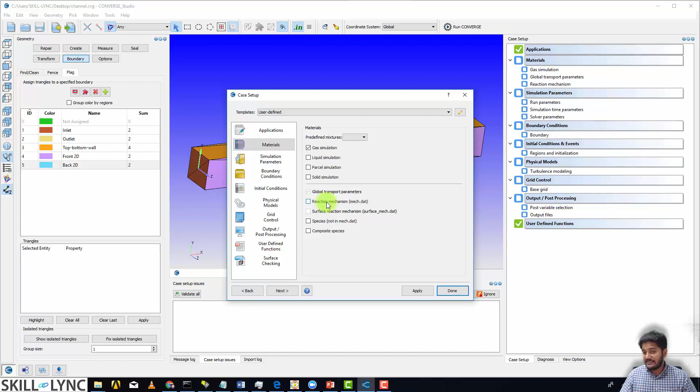So the first thing that I'm going to do is, in this case I'm interested in running a laminar flow simulation. So what I can do is, first I can go to materials, and you can see that I need only gas, but I don't need any reaction mechanisms because I'm not simulating combustion here. So let's just unselect that, and the predefined mixture is going to be air, and click on apply.

And when you do that, Converge basically says, hey, do you want to go with air as the predefined mixture and overwrite gas.dat, mech.dat, and therm.dat? Yes, we do. So let's just click on yes and then click on done.

Similarly, we don't need a turbulence model because this is going to be a laminar flow. So I'm going to click on physical models, and I'm going to just uncheck turbulence modeling, click on apply, click on done. Now any other parameter that you want to set up or explore, you can just click on the headings.

For example, when you click on simulation parameters, if you want to include body forces, which is gravity, you can check this. In this case we are not going to do that.

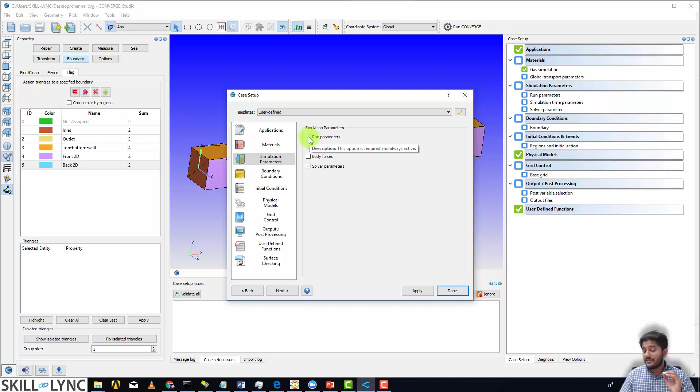Now you can see that run parameters, simulation parameters, and solver parameters have been checked, and this has been grayed out. Why is that? Well, these are default fields, they will never go. So for example, if you just hover on this, you will see that this option is required and is always active, right? So there's nothing you can do about these.

So let's just click on done. Alright, so now the idea is very simple. We are just going to work our way from top to bottom to set up the simulation.

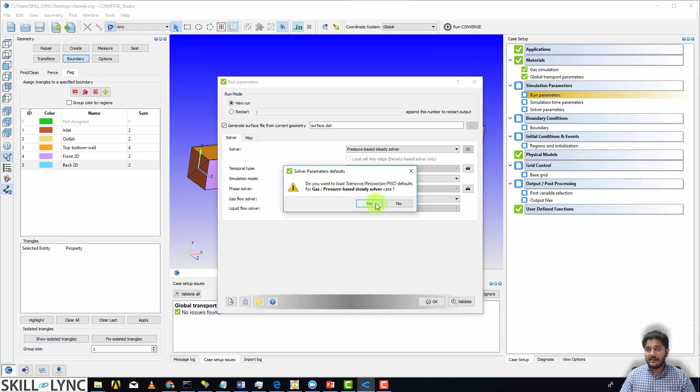So for global transport properties, I'm just going to click on OK, and I'm using the default values. For run parameters, we are going to be using a pressure based steady solver. Let's click on OK, and then we are going to accept the default tolerances and relaxations. Let's click on yes for this also, and then we're done with it.

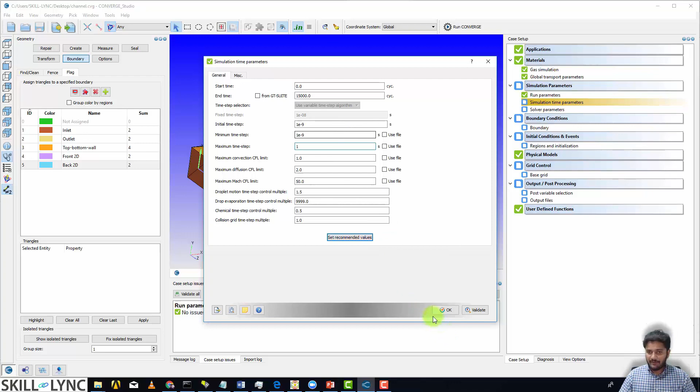For simulation time parameters, we are going to start with 0 cycles. We are going to end at 15,000 cycles, and we are going to start at 1e-9, which is going to be the starting time step. 1e-9 is the minimum time step, and 1 is the maximum time step as well. So let's click on OK, and then for solver parameters, we are just going to click OK.

Then comes your boundary. So here we are going to say at the inlet, we are going to be having an inflow boundary. It's a total pressure inlet where the pressure is going to be 1 Pascal more than 1 bar. So it's going to be 1 followed by 4 zeros, and there's going to be another 1. And air is going to be the incoming fluid.

And then at the outlet, we are going to be using a static pressure outlet. So let's select outflow, and here you can see that the pressure is 0 Pascal. We are just going to say that this is 1 bar. Alright, so make sure that you're inputting this correctly.

Sometimes we have seen that people accidentally put one additional zero and the flow starts to reverse. Make sure that you don't do this. Species backflow: if your outlet pressure is higher than the inner cell pressure, then the flow can actually reverse. If the flow reverses, then it's going to come in at 300 Kelvin, and the incoming fluid is also going to be air.

Top and bottom walls are just going to be walls, and we are basically saying that this is just going to be a no slip wall. For temperature, we are going to say it's a specified value, which means it's a fixed temperature or a Dirichlet boundary condition, and the value is 300 Kelvin. We click on OK.

So what we are doing here is just setting up the flow simulation. I understand that there are so many things that might not make sense. Initially, the reason why we are doing this is to make sure we are able to get from the simulation start to the simulation end, which is basically post-processing and all that stuff. Since there are so many softwares in play, I want to make sure you guys are able to run everything perfectly, and that is why we are taking up a very simple test case and following through. At this point, please don't worry if you are unable to understand what a particular option means.

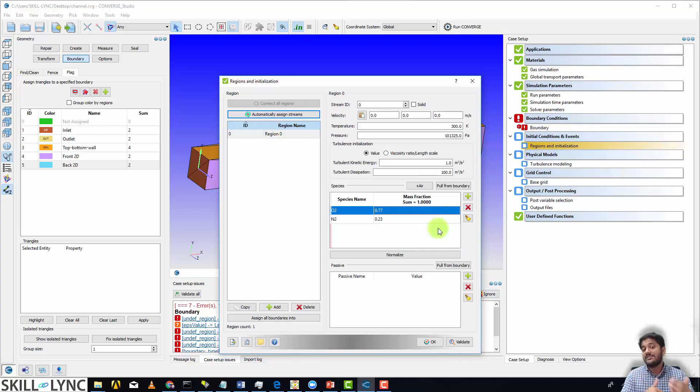Now this is not the concentration of air. Air contains 77% nitrogen. However, here I've said that air contains 77% oxygen, which is just the reverse of it. But there is a good reason why I'm doing this, and you need to remember this term 'initial conditions,' because I'll be making a reference to that later. So let me click OK here.

At this point, turbulence modeling is not required. I'm not sure why it appeared again. Let me click apply and let's click done. So now let me click on boundary again, right click, and validate.

Now you can see that you have the same errors. It says undef underscore region, which basically says undefined region. It says boundary 1 is not assigned to a region. What it means is, you have all your boundaries, which is your inlets, outlets, and all that stuff, but they are not assigned to a volumetric region. Well, they need to be, right?

I'm going to select this guy and select region 0. But what is region 0? Well, if you're not sure, don't do this. Close this guy, go to regions and initialization, and this is region 0.

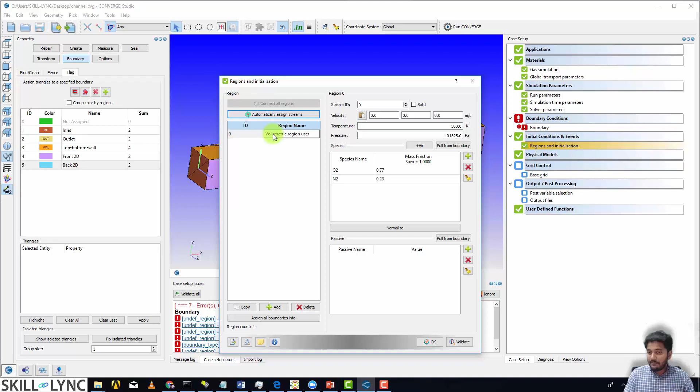You can right click or use F2 to rename this, and I'm just going to call this volumetric region. I'm going to be really verbose and say this is user defined, and click OK.

Alright, so now let me go to boundary and double click on region undefined. You have this option, right? I'm just going to go ahead and select all of them, and put them in this particular volumetric region, and click OK.

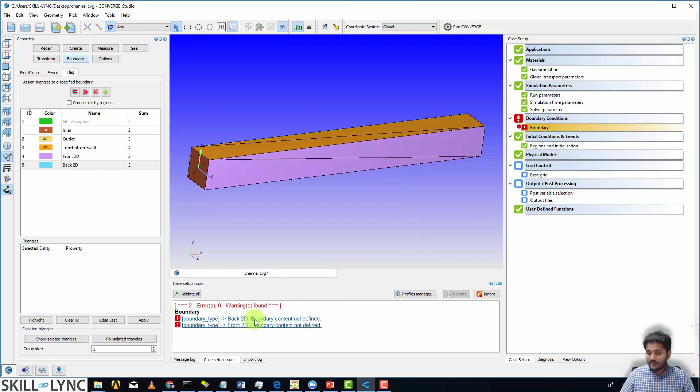So now if you right click and click validate, boom, most of the errors are gone. You have only 2 errors. So let's click on this guy. You can see that the front and back have not been assigned a boundary type. So let me click on front 2D and say this is a 2D boundary, and back 2D is again a 2D boundary.